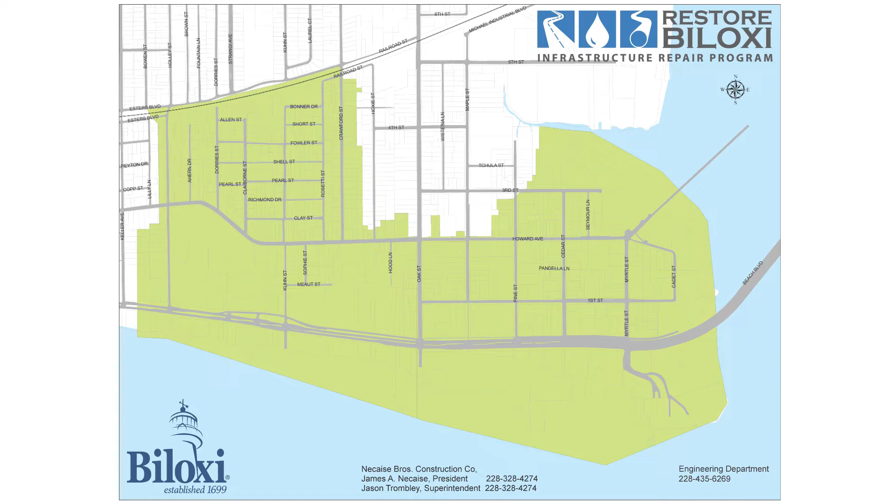And James, if you don't mind, Janice, you'd like to start? Okay, so the project as a whole goes from Cadet Street to Holly Street, Highway 90 to Railroad. The contractor has already installed most of the pipes east of Oak Street and paved. He's working his way west till he gets to Holly. So he is going to begin installing sanitary sewer on Crawford Street beginning Monday. He'll be starting at Howard and working his way up Railroad. This should take approximately 6 weeks to install the sanitary sewer and services, and then he'll follow that up with installation of water from Howard to Railroad as well, and this should take approximately 3 weeks as well.

And there's two separate storm drain systems. One flows to Railroad and the other flows to Howard, like Walt was explaining. He can only install the storm drain north to Railroad after the water main is installed. He'll have to come back in springtime to install the storm drain south to Howard, because some of the storm drain needs to be installed down Rosetti and Howard before this can happen. But we will be installing temporary asphalt in the meantime, since there'll be somewhat of a time frame between the two. Did you want to go over sequence, James?

I don't need a mic. I'm loud enough. Like Janice mentioned a while ago, we're going to start with the sewer on Monday. Can y'all hear me?

As far as traffic, any house north of the sewer operation will be able to exit to Railroad Street. Any house south of the sewer operation will be able to exit to Howard Avenue. So we're going to try to keep traffic open.

Let me see if I can correctly state the contractor's intentions. He's going to start at Howard Avenue, because that's our deepest sewer, about 16, 17 feet deep, and the sewer shallows as we head north. His plan of operations, and he can correct me if I'm wrong, is he'll excavate and start laying out the sewer a little bit at a time, install the sewer, and at the end of the day, backfill to the best of his ability.

We have a cross-section, I believe it's on this side, of how narrow our Crawford Street is. Because of the depth of the sewer and the size of Necaise's equipment, there really is going to be very little room for a car to pass by if he's in active construction. So what we're probably going to ask is that all residents park initially. This is a north view, by the way, looking on Crawford.

He's going to be installing these sewers first, the deep sewers. So we're probably going to ask that all residents, if they typically park on Crawford, park on the east side, so we don't have cars on this side and cars on the other side. That way HCUA and their waste management trucks, and your fire department, aren't trying to get around. We're going to try to get everybody to park initially on the east side of Crawford.

That will free up the west side for the contractor to work. I know some of us live on the west side of Crawford, but this will clear up a working area for our contractor and hopefully minimize the impacts. The right-of-way is to the back of the sidewalk, so we don't have a lot of room to put the dirt that we're excavating, so all cars really need to be off the street.

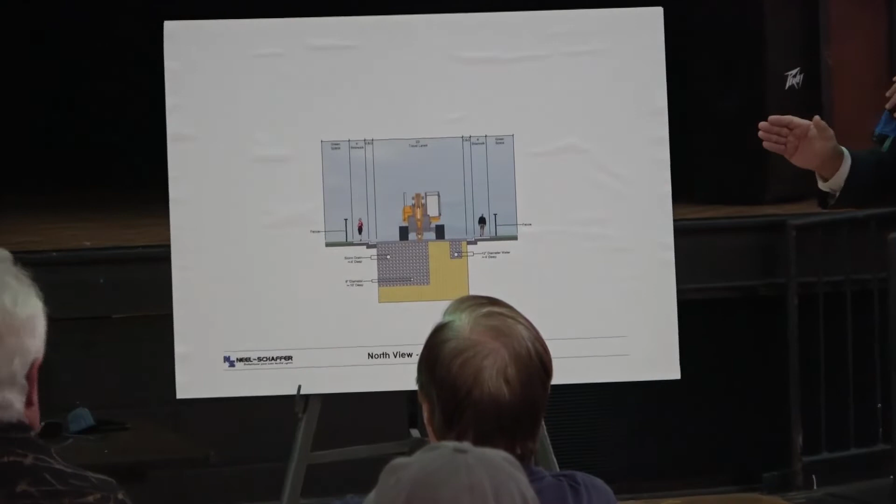Our contractor, James, made mention that our right-of-way is right here at the back of the sidewalk, so they really don't have a lot of room to put any of the excavated dirt. They're going to excavate, load it in trucks and move it around, so he's probably going to ask instead of parking to the east, if at all possible, to park further downstream.

There will be trucks running back and forth, big trucks, so the further we can park either north of the operations or on the far east side after they get past, we just want to try to create clear lanes for the trucks and minimize impacts to both the operations and you as residents who live there. We will have everything open back up by the end of the day.

The contractor said he will open up all areas that they've started work on in the beginning of the morning, at the end of the day. Even if there's a rain event, we're just going to backfill. The only spot that might not be open will be in the deep area where there's a trench box, but every house will have access by the end of the day.

On the handouts, we left Mr. Necaise's phone number for those of you who have issues at the end of the day. That would be the first number to call. And if that doesn't work, you can call the city of Biloxi. We did elect to put that on also.

Now I think what I'd like to do is a Q&A. We're going to turn on this other microphone. George, my inspector, is going to pass it out to the audience if you have any specific questions. I know there's some questions about drainage, maybe schedules.

We do have three utilities to put in. We have this deep sewer on the west side. We have more shallow water on the east side, and then we have storm drainage. Depending on where we're at on Crawford, we're going to put in the deep sewer all the way to Railroad, and then we're going to come back and do the water. Come back and start the water, and then at some point we're going to do some of the drainage. Let me stop you.

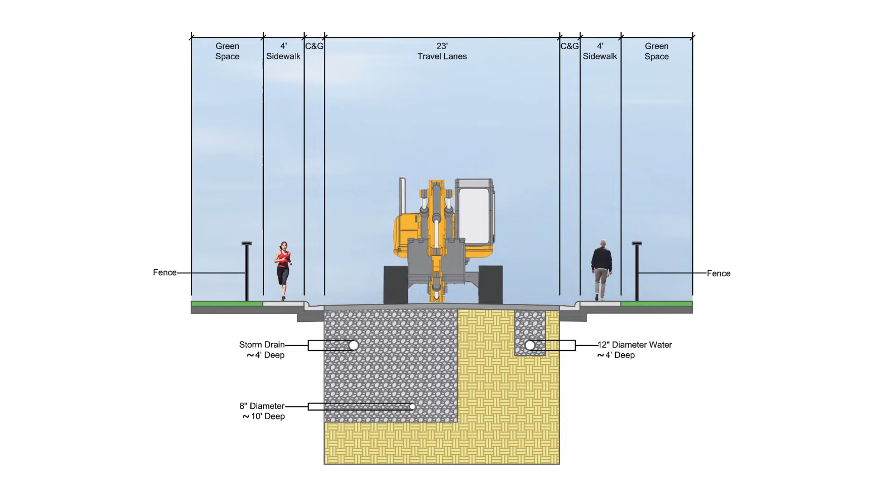We talked about this earlier, we may stop the sewer three-quarters of the way down and go ahead and pick up the storm drain from Railroad, bring it to the south. Reason being that the storm drain there is deeper than the sewer, much deeper than the sewer. What we don't want to get into is excavating deeper than the sewer we just put in and it caving off and us losing the sewer main we just installed. So we may do a schedule adjustment, but it has no effect on entering and exiting Crawford Street.

So we're going to have at least three different operations over an extended period of time. All right, well, with that, our public information officer behind the camera there is Cecilia Doswalton, and she said to make sure that when you ask a question in the mic, I am to repeat it so it picks up on her video camera. So does anyone have any questions at this time?

Are you going to tear up the sidewalks at the same time? No, not on the south end. We'll come back later and get them, but not right now because we're not doing storm drain in that area. We want to leave as much there for y'all to walk and access your home. So the question was, are the sidewalks going to be removed during the construction operation? Digging up the street, the sidewalk will be—no, the sidewalk's not going to be taken up on the south end, not yet. It will later on.

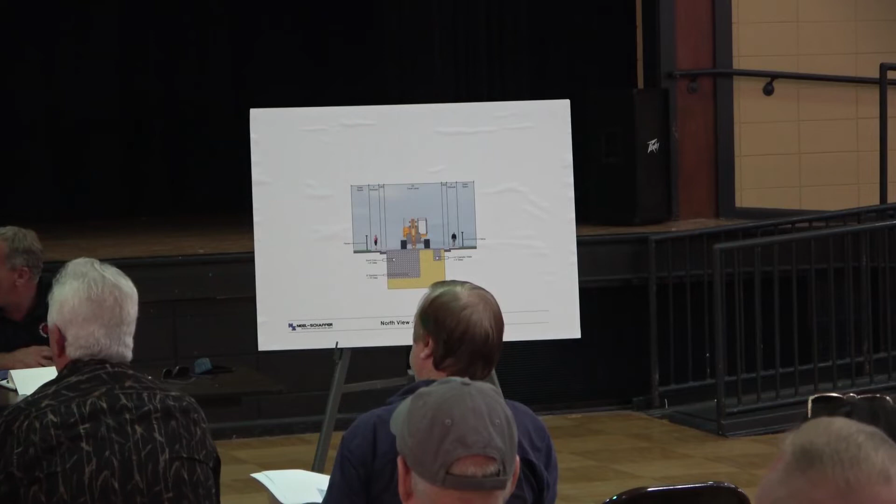Creosote on Howard Avenue, the sewer. We weren't pumping any creosote. When our contractor was coming through with the deep sewer along Howard Avenue, which was 18, 19 feet deep below grade, we came across, between Crawford and Rossetti, some suspect material which smelled like creosote, so it had a strong odor to it. We had it tested.

It had what they call PAHs, polycyclic aromatic hydrocarbons, which can be from creosote, old coal, or burning trash. It's a naturally occurring substance in some parts of the ground. In other parts, it's from maybe somebody that placed it there, even oil. It could be organic too. PAH is what they call it. It's a little bit outside of my specialty.

Our contractor secured an ERAC, an Environmental Response Action Contractor, approved by the Mississippi Department of Environmental Quality. They submitted a proposed plan to remediate the water and the soils, and it was approved by MDEQ. They treated the water, which is why you saw a lot of big, large tanks down there the past couple weeks. They removed any suspect soil and transported it to a hazardous material landfill, and all that work has been done.

So I was down there, and they were dropping pipes into the ground with water, like 40 foot, and something was coming out of that water, it was black. Those pipes are what they use, the well point, to draw out the groundwater so it can de-water the ground during the excavation, allowing them to get down to those depths. But all that water was tested multiple times by the ERAC to mitigate it to meet the MDEQ levels of treatment.

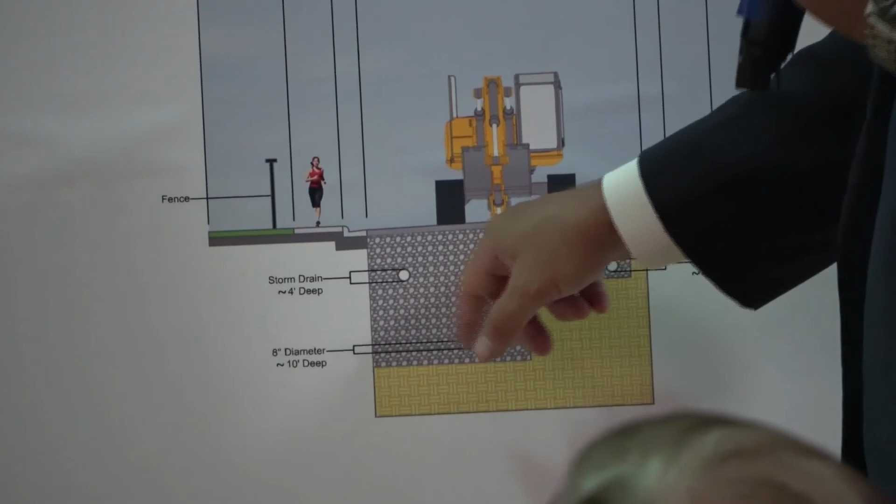So we're looking at the north view here. Our sewer is the deepest, and it's on the west side. The water will be on the east side, and then the drainage will be back on the west side, except for cross drains. So all your drainage, north and south, will be on the west side, shallower than your sewer, obviously. We do have some cross drains going across the residence property east-west in a few locations, but drainage will be all on the west side unless it's a cross drain.

Well, you have all this video and everything that's there now. Yeah, like they normally do. So everything is in place that's there. The driveway, that's always a problem. If I had a driveway, I didn't have a driveway. I said I'm asking to see if they have a video on that matter, to make sure the video shows it, because people complain before—different street, I had a driveway and then they put it back like they didn't have a driveway. So you already have video, so the people's yard is where it is now, like their fence, driveways, whatever they have.

Yes, sir. So the question was, for those who didn't hear, is everything videoed or photographed to show the conditions prior to Nikkei starting construction? The answer to that is yes. Both Mr. Nikkei's team and my Neel-Schaffer team have both gone out and videoed and photographed the conditions as they are today before we touch it. I want to make sure you have this down. Yes, sir. Main thing, 'cause everybody goes back saying you didn't put mine back, whatever. There's always been a question. Yes, sir.